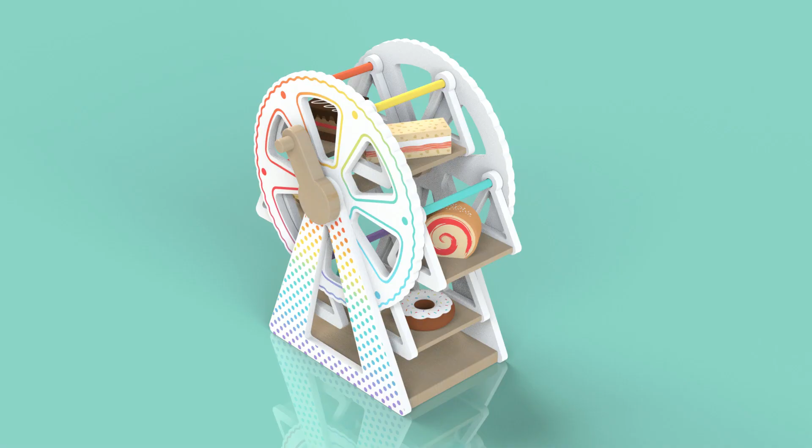Hi and welcome to this two-part Solidworks tutorial for a toy afternoon tea Ferris wheel. In part 1 I'm going to show you how to create the Ferris wheel part for an assembly. Part 2 will show you how to create a motion analysis of the Ferris wheel assembly. The decals and food parts for this model are available for download in the description below if you'd like to recreate this design. To begin, open a new part.

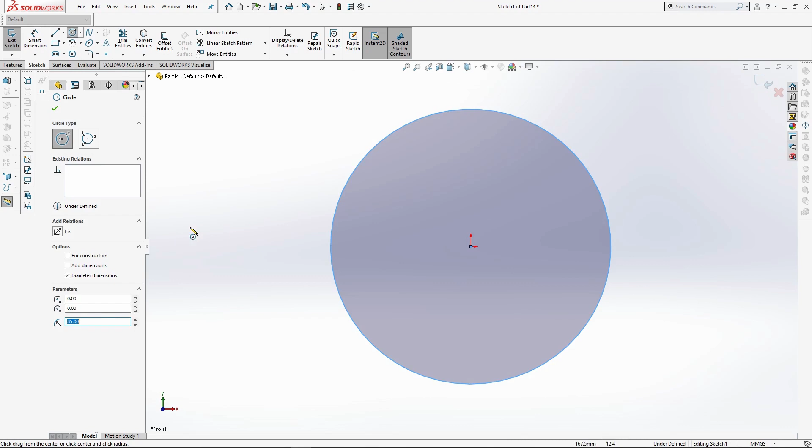I'm starting with the wheel of the structure. From the centre axis, sketch a 170mm circle onto the front plane and tick the for construction box. Then, using the ellipse sketch tool, draw an ellipse on the top point of the guide circle. It should have a horizontal radius of 7.5mm and a vertical radius of 5mm, making the overall dimensions 15 by 10mm.

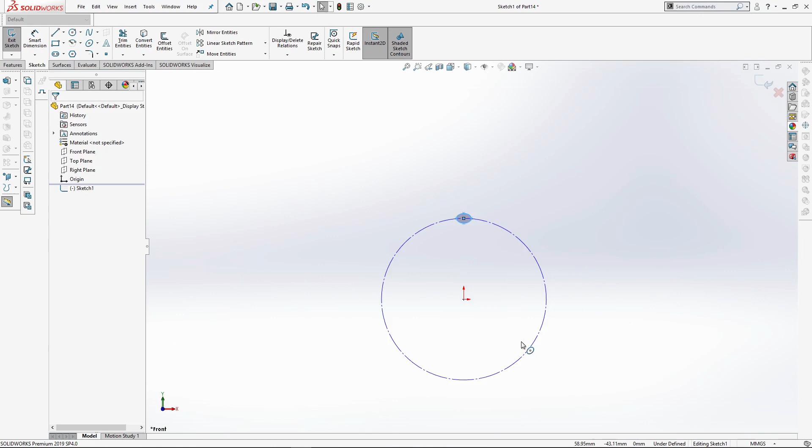Delete the guide circle and open the circular pattern sketch tool with the ellipse selected. Change the instances of the pattern to 54 and OK the feature. Use trim entities and delete all the inner sketch.

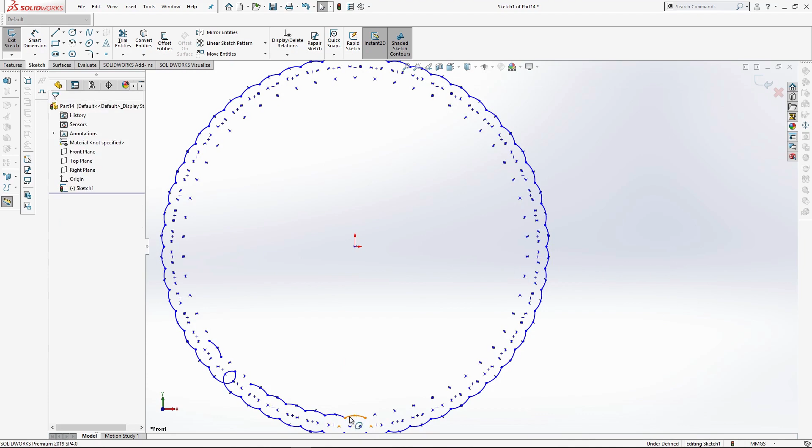To create the inner design, sketch a 145mm circle, then a 50mm inner circle. Use the centre line from the centre to the top of the outer circle. Then draw a horizontal line at 22.5mm and join it up to the centre.

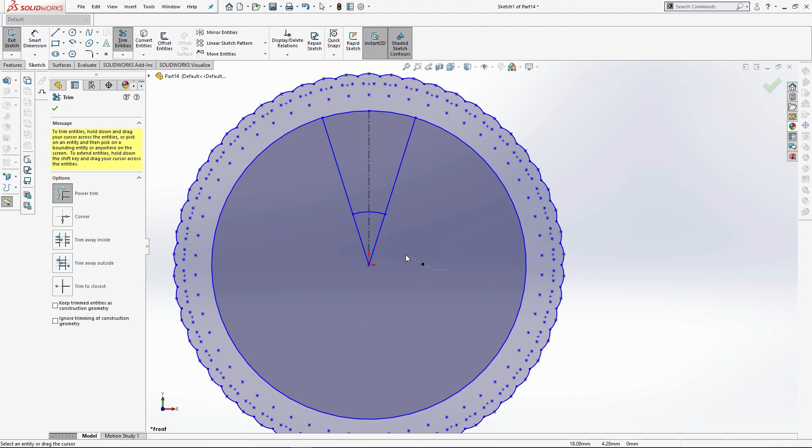Mirror the two entities from the centre line. Trim away the outer lines, then all the inner lines, leaving the wedge shape. Fillet the sketch corners by 5mm.

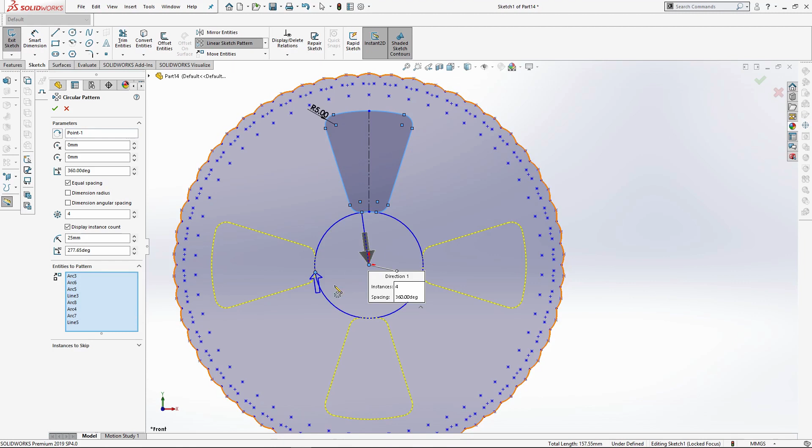Use the circular sketch pattern again. Select the centre axis for the perimeter's centre. In the Entities to Pattern box, select the segment sketch and change the instances to 6 and OK the feature. Finally, draw a 16mm circle in the centre of the sketch and extrude this sketch by 6mm.

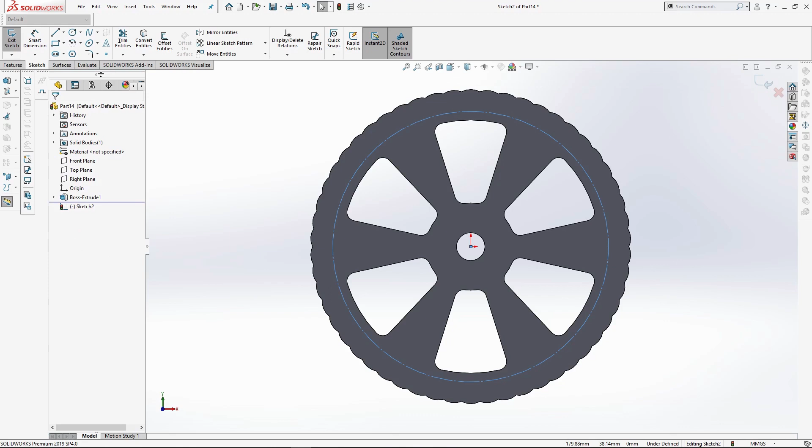Now, sketching onto the front face of the extrusion, draw a 155mm circle, tick for construction, then draw a centre line from the mid-axis to the middle point of the wheel, and another from the mid-axis to the middle point of the wheel between the cutouts. Then where the points cross each other, draw a 6mm circle. Use the circular sketch pattern again to create 6 equally spaced circles and extrude cut them by 2mm.

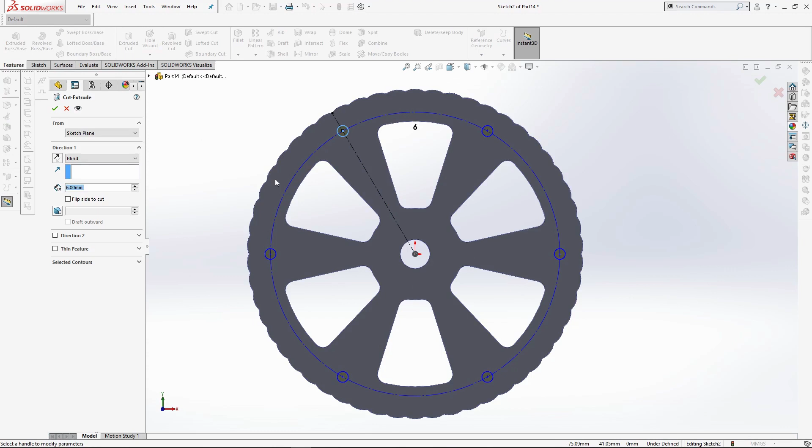Sketching onto the cut face and holding Shift, I select all the faces and convert the entities. Extrude this sketch by 84mm and untick merge result so that they're all separate bodies.

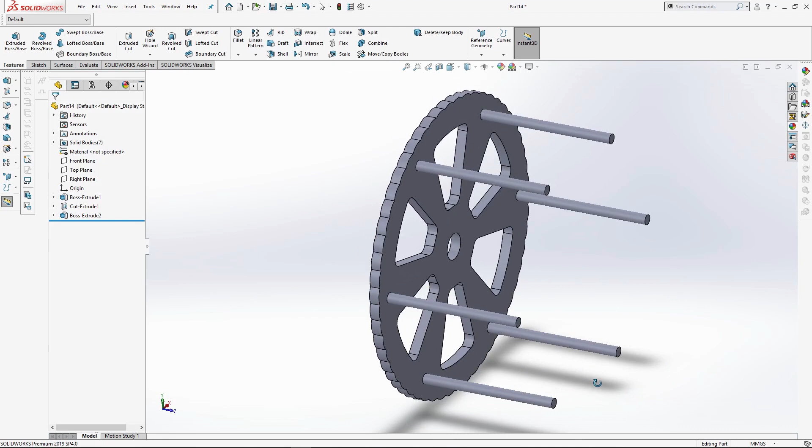For the other side of the Ferris wheel, I need to mirror it. There are other ways I can do this, such as move and copy or sketch and convert entities. So to mirror the part, I need to add a new plane. Using the front plane, select reference geometry and space the new plane 46mm away.

Then using the mirror feature, select the wheel side body. A preview should appear like this. Make sure the plane is centered to the poles and OK the feature.

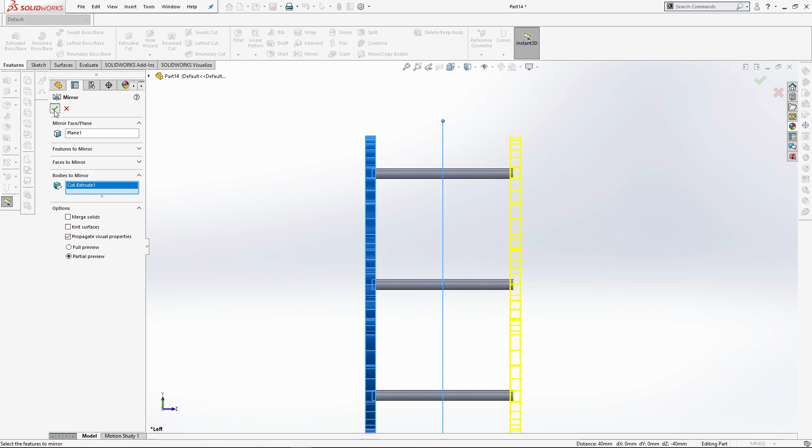With the part finished, I can add the decals. Selecting the wheel side bodies in the Solid Bodies drop-down menu, go to the Edit Decal icon and browse for the white decal. Open it and project it to cover the bodies.

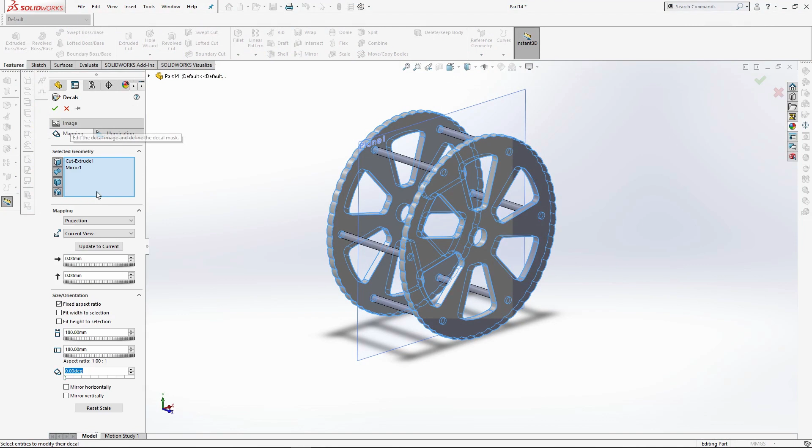Go to Mapping, select Projection in the drop-down menu so that the decal window appears, and drag it to cover the wheel. For the front of the wheels, select the front face, Edit Decal, and browse for the Ferris wheel front decal. To fix it into position, I use Mapping again, Projection, and change the dimensions of the decal to 180mm, unticking the Fixed Aspect Ratio box.

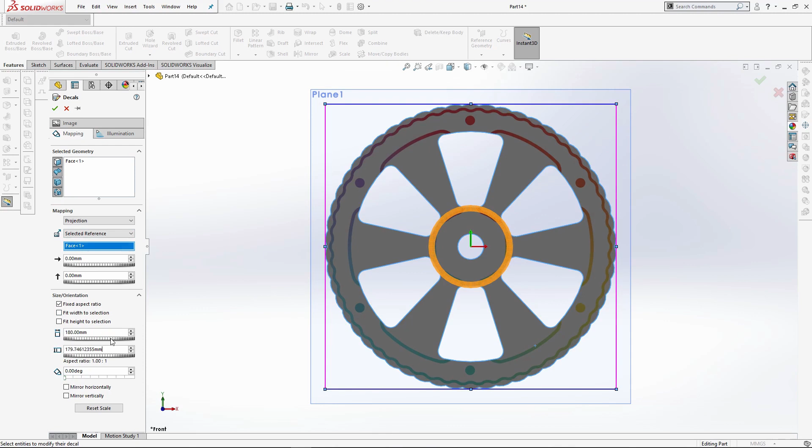Then just rotate the decal by 30 degrees. In the Selected Geometry box, select the back face of the wheel so that it projects onto both faces. I OK the decal once I'm happy with its placement.

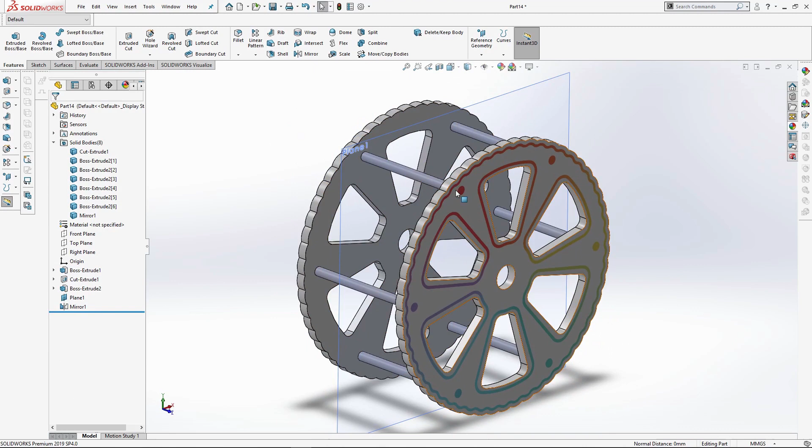Next, I'm going to colour each rod with the decals, matching the rod colour to the opposite spot. There should be a red, orange, yellow, mint, blue and lilac rod, in that order. Once all the decals are on, save the part as Ferris wheel and close it.

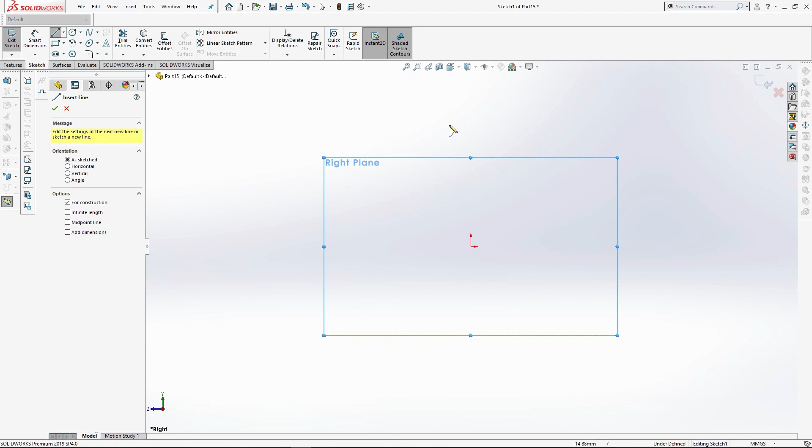Moving on to the Ferris wheel handle, start a new part and sketch onto the right plane. Draw a 124mm vertical line. This will be the edge of a revolve sketch.

Draw a 17.5mm line onto one end. Then a 10mm line going inwards. Draw a 7.5mm line upwards from the line. Then a 104mm horizontal line, joining it back up to the centre line.

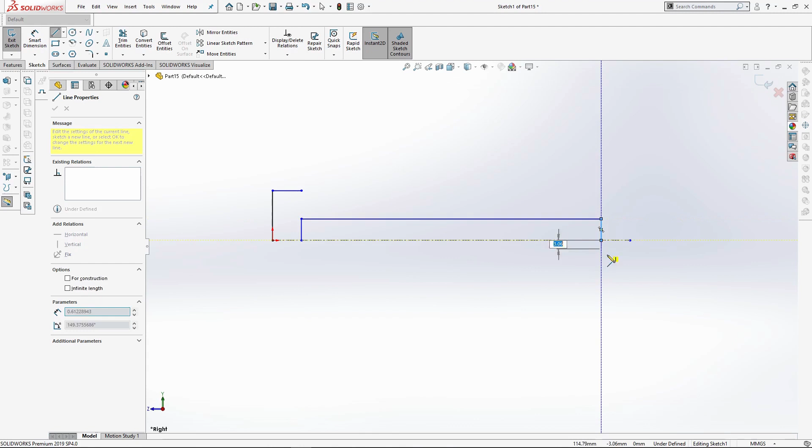Make the shorter lines construction sketches and join the lines here. Repeat the sketch on the other side.

Use the centre line to draw a 12mm guideline. Using the guide point, I sketch up from the revolve line by 12.5mm, then inwards by 10mm, joining it back up to the line. Trim away the inner sketch lines and repeat the same sketch on the other side.

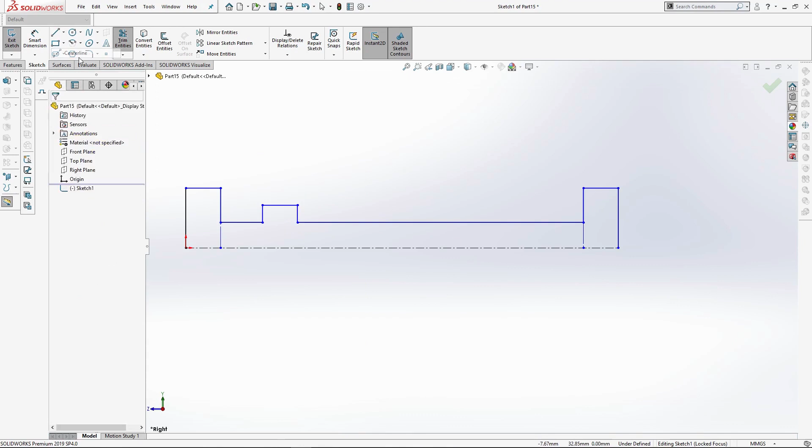To revolve the sketch, just tick yes on the warning. It will close the sketch automatically when I select the centre line for the revolution axis.

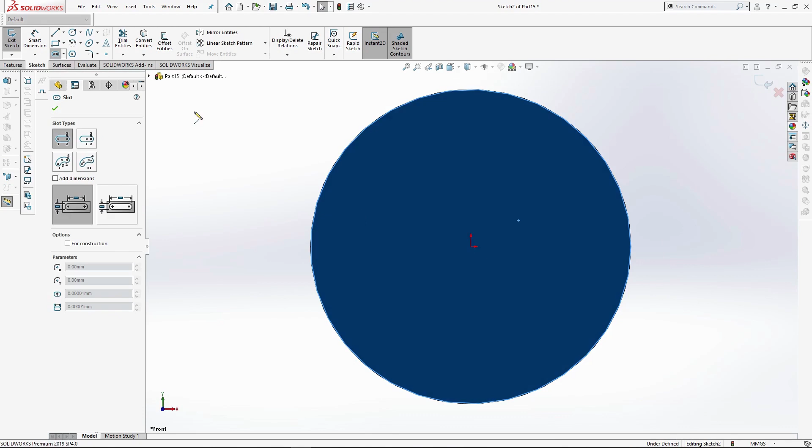Fillet the back face of the revolve by 1mm and then start a new sketch onto the front face of the revolve. Using the slot sketch tool and starting from the circle centre, draw the slot 45mm by 20mm wide. Extrude the slot sketch by 10mm and merge it into the part, flipping the direction of the extrusion to look like this, creating a handle.

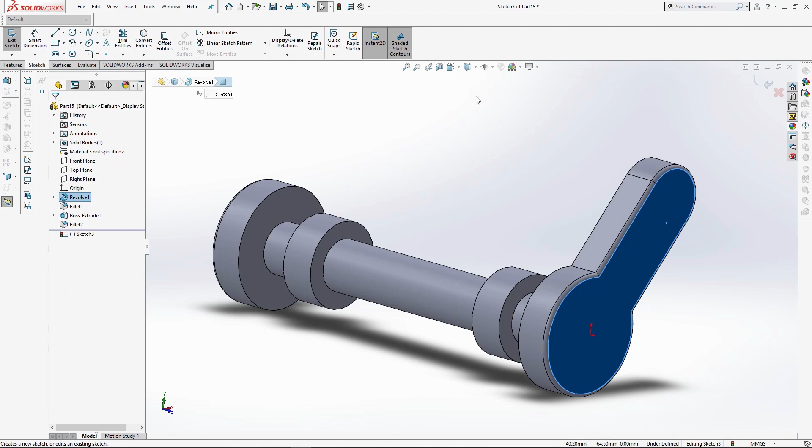Fillet the face of the extrusion by 1mm. Finally, sketch a 10mm circle onto the handle face. Use the midpoint of the slot extrusion here and extrude the sketch by 10mm, merging the result, and again fillet the top face by 1mm.

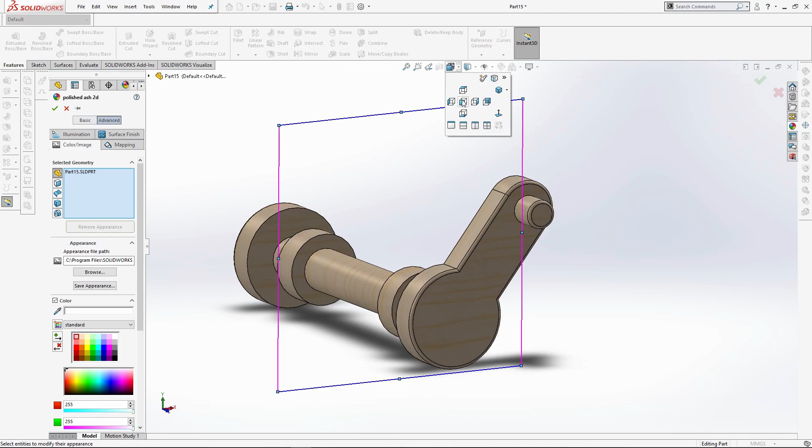To add a wood appearance to the handle, select Edit Appearance. I'm using the polished ash finish, but I'm resizing the appearance using mapping, projection, and typing 25mm into the width box. Both the dimensions will change because fixed aspect ratio is ticked. This will make the wood grain smaller. You can also change the direction of the wood grain by typing it in. Save the part as the wheel handle and close the part.

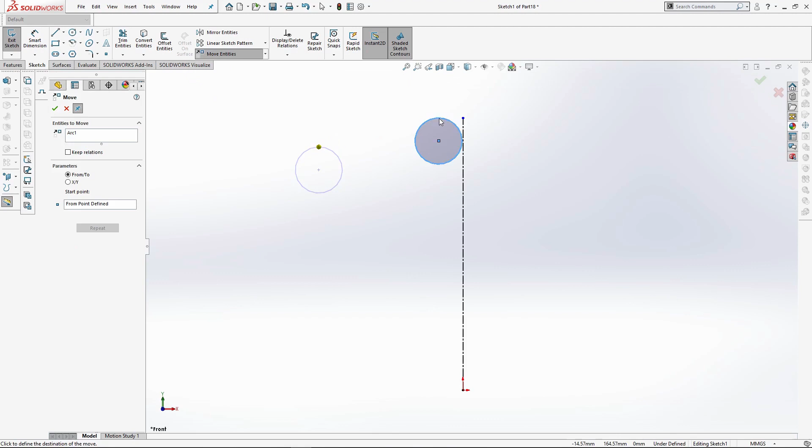I'm going to move on to the Ferris wheel base. Now again, open a new part and sketching onto the front plane, draw up from the centre axis using the centre line by 165mm. Draw a 28mm circle and move it using Move Entities to the top of the centre line. Then draw a 16mm circle in the centre of that. Use the midpoint line and sketch from the axis an 82.5mm line, creating a 165mm line along the bottom.

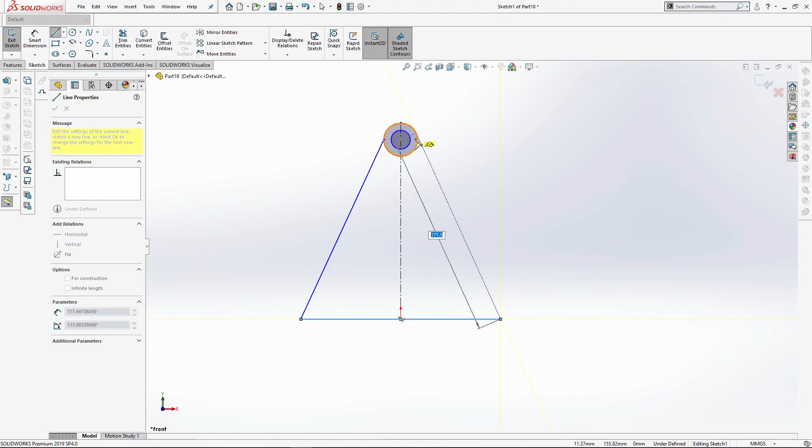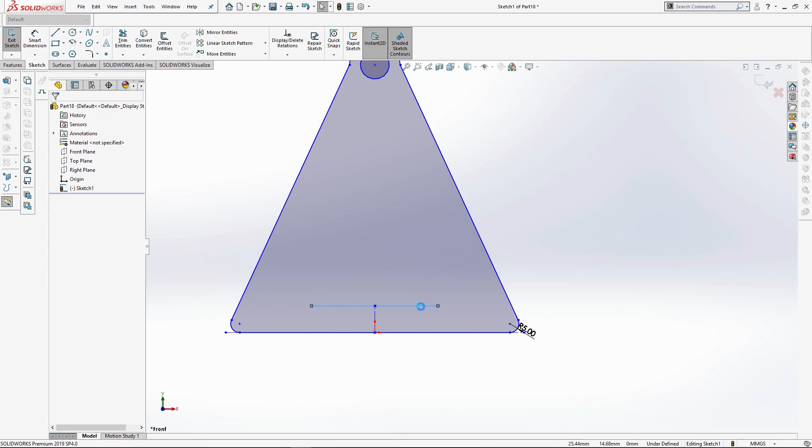Select the line for construction, then join up the sides of the outer circle to the bottom guide points, back up to the circle. Trim away the inner part of the circle like this, and use the sketch fillet tool to fillet the two bottom corners by 5mm. For the inner shape, delete the guide line and sketch a new guide 15mm up from the centre. Using the midline sketch again, sketch 35mm from the top of the guide, making it a 70mm line. Again, select the line for construction.

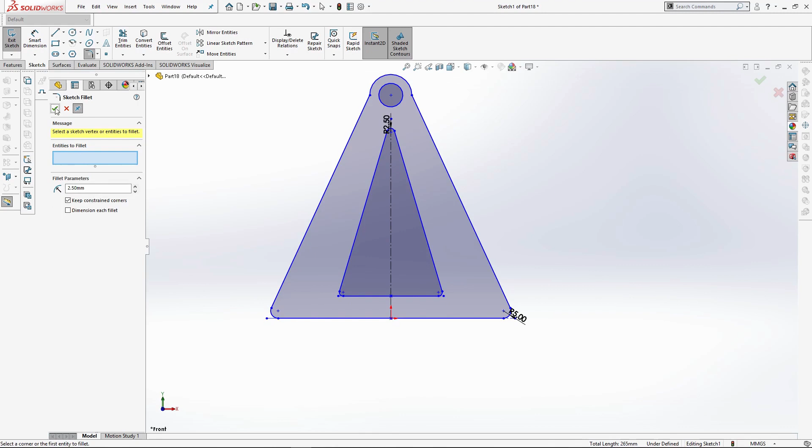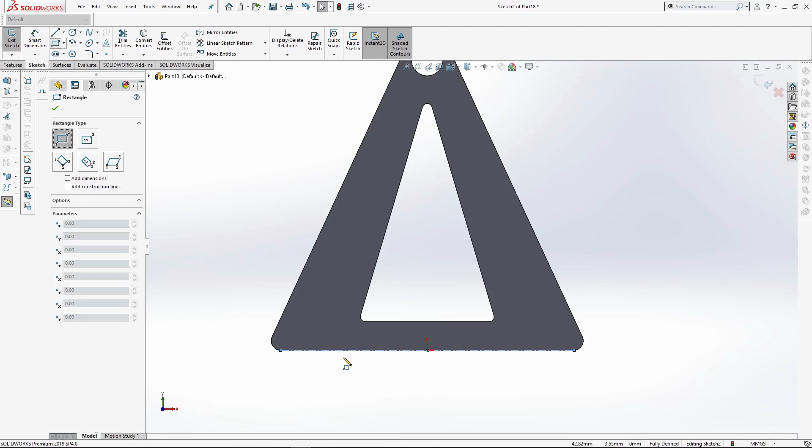Draw a centre line from the middle of the line by 120mm and join up each point using the line sketch, creating a triangle. You then need to fillet all three corners of the triangle by 2.5mm and extrude the sketch by 6mm. Sketching onto the front face, select midpoint line and check for construction. Starting from the middle of the axis, I draw a 75mm line. Make sure the overall line length is 150mm and use it to draw a 10 by 150mm rectangle. Extrude the rectangle by 92mm, unticking merge result.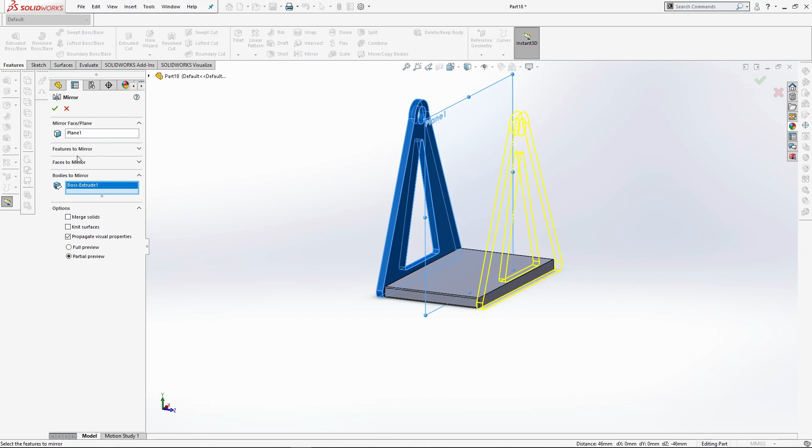We're going to fillet the two side edges of the base extrusion by 1mm to soften it. I'm also going to mirror the stand side using a new plane, 52mm off the front plane. Then mirror the side body like this. Moving on to decals, select the side bodies of the base in the feature tree, the edit decal icon, and browse again for the white decal. Open the decal and cover both sides. Then in the same way as the Ferris wheel, add the Ferris wheel base decal to the two outer faces of the base using projection.

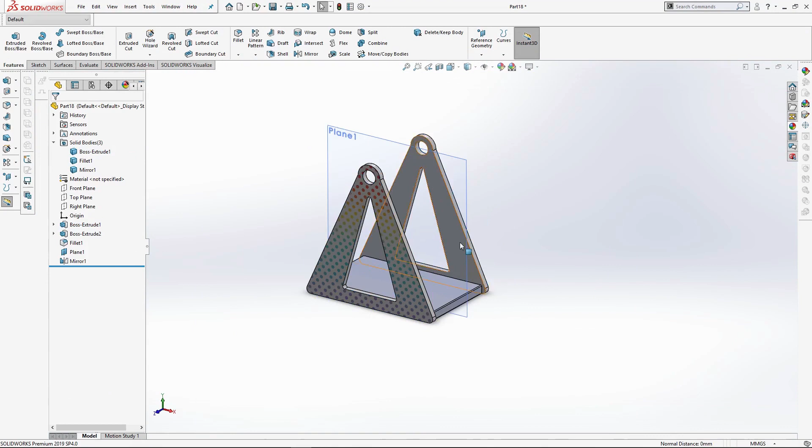Finally, I'm adding the polished ash appearance to the base, shrinking the wood grain again using mapping and typing 25mm into the size boxes. Once it's done, save the part as the Ferris base and close it. The last part is the Ferris wheel carts. Start a new part.

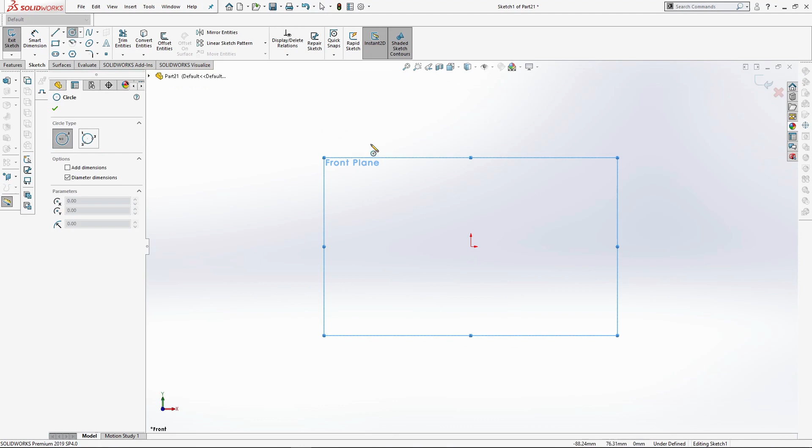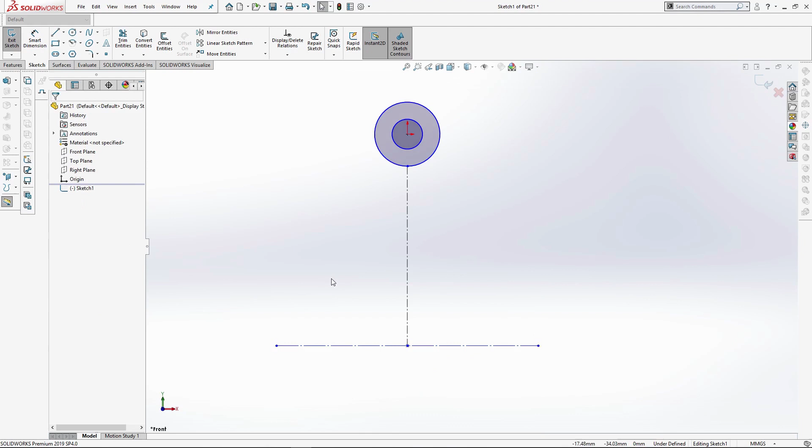Sketch onto the front plane and draw a 15mm circle with a 7mm inner circle. Use a centre line to draw a 42mm line down from the bottom of the circle. Tick the midpoint line and draw a 30mm horizontal line from the end of the guideline. The overall length of the line should be 60mm. Tick the box for construction. From the top of the circle, sketch a 12mm centre line downwards and to the edge of the outer circle and the other side. Then join up the other guide points with the line sketch.

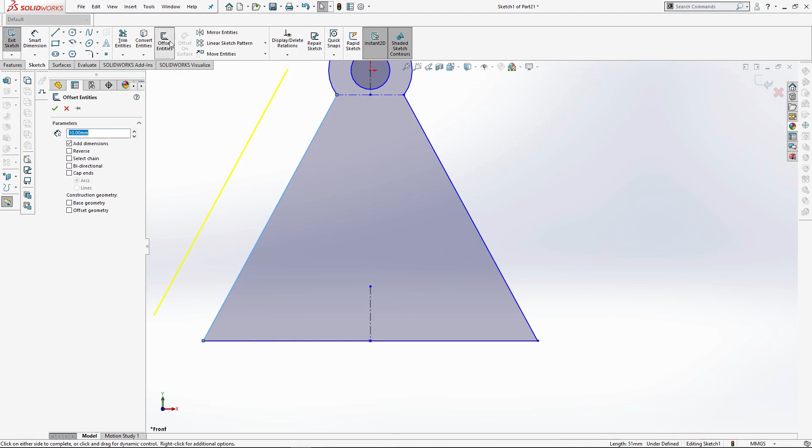Trim away the inner sketch of the large circle. Edit the middle guide length to 10mm and offset the outer edges of the sketch here inwards by 5mm. Draw a horizontal line from one offset to the other. Level these with the guide. Select the offset sketches and make them construction lines.

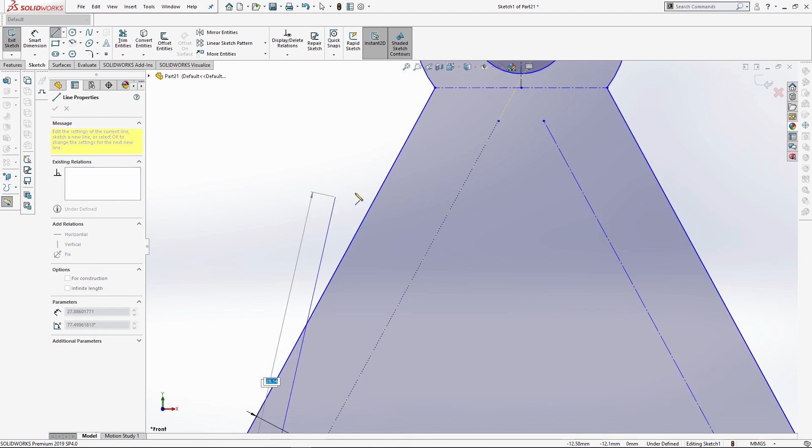And use the line sketch from the bottom point of the sketch and hover over the guide to make the yellow guides appear. Following the yellow guide line, draw upwards to the middle guide, ensuring you are along the yellow guide. Then back down the line, creating a triangle. Fillet the inner triangle corners by 2mm, then the outer bottom corners of the triangle by 5mm. Extrude this sketch by 6mm.

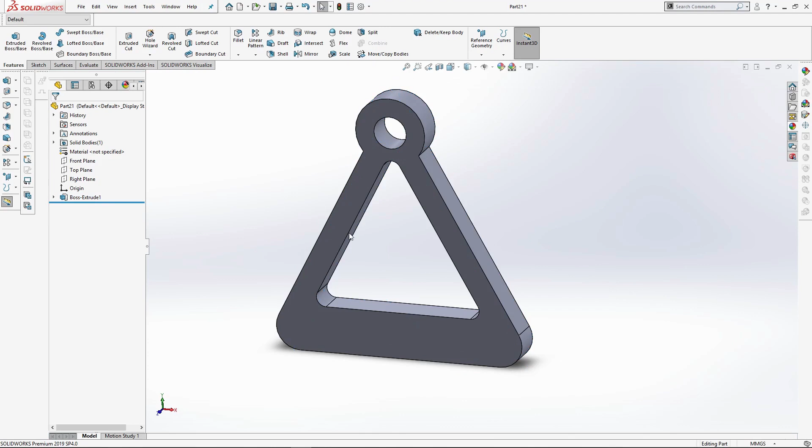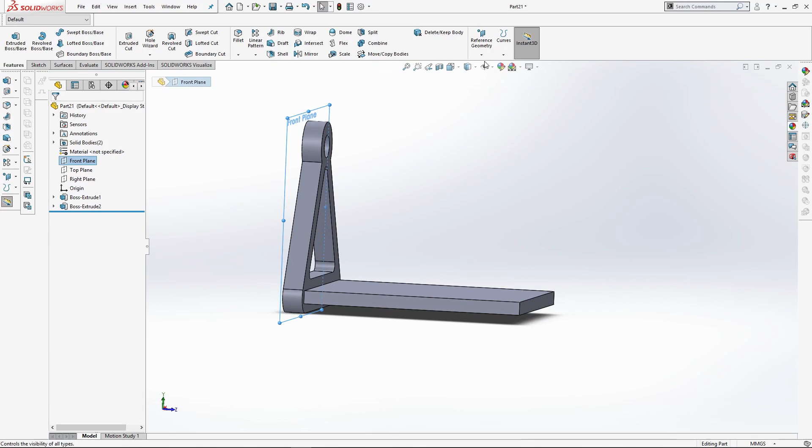Draw onto the front face of the extrusion, 3mm from the bottom. Draw a 4x48mm rectangle, placed in the centre, and extrude it by 66mm, unticking the merge result. Then add a new plane, 39mm off the front plane, and mirror the cart side. For this part, I project the white decal onto the cart sides, and finally add the polished ash appearance to the cart base, resizing it once again to 25mm to make the grain smaller. With this part complete, save it as the Ferris cart.

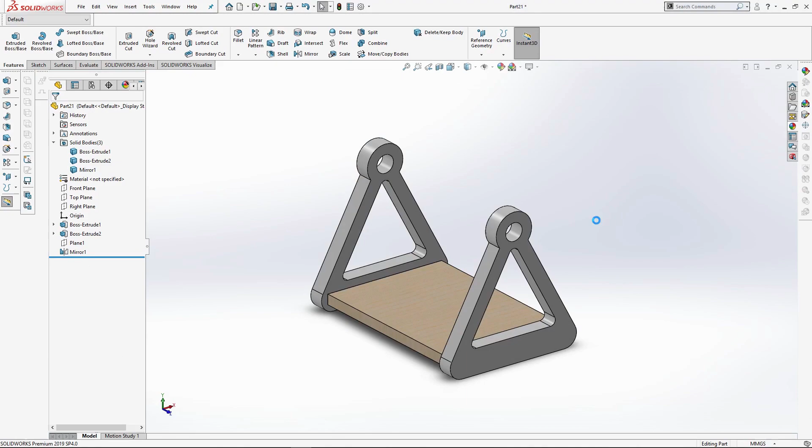With all the Ferris wheel parts finished, watch part 2 of this tutorial to see how to assemble a Ferris wheel, add the three accessories, and create a motion analysis from the model.